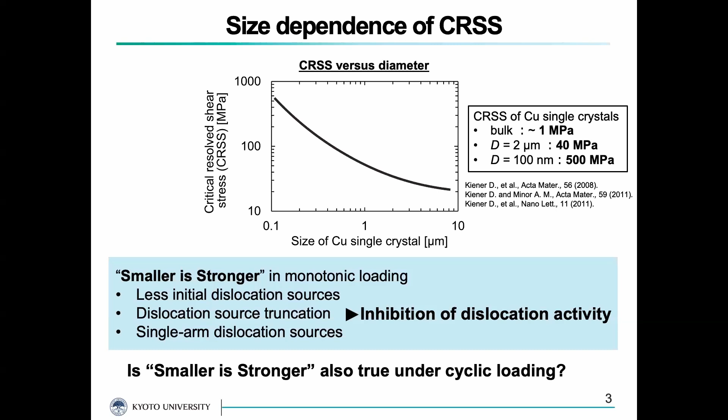We revealed that copper single crystal with a square cross-section of 2 micrometers fatigued at a resolved shear stress amplitude of 10 megapascal, and that was about 1/3 of the fatigue crack initiation limit of the bulk. So smaller is not stronger under cyclic loading. And moreover, micro-sized copper single crystal fatigued at a stress amplitude lower than the CRSS of such size.

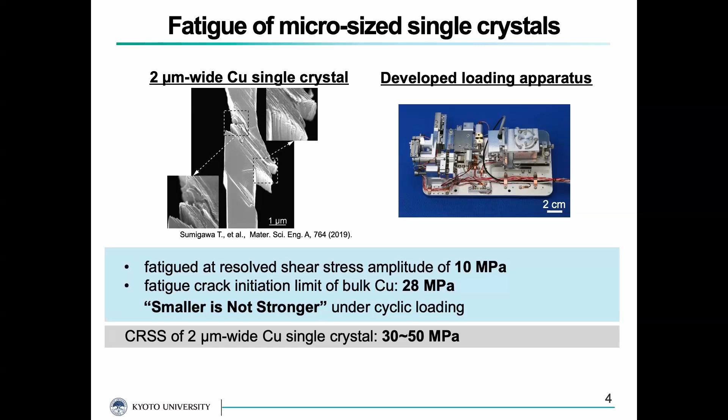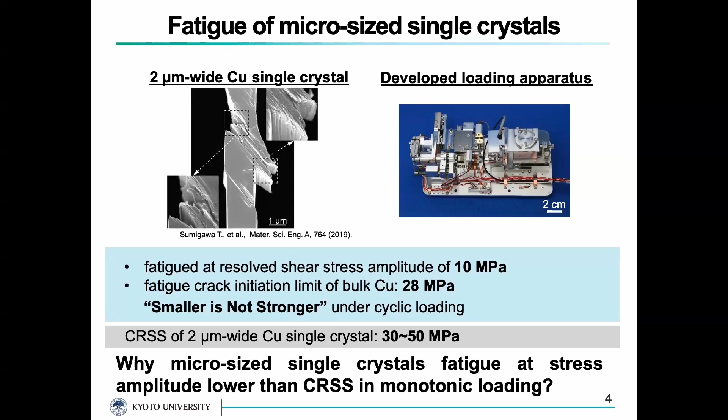Because fatigue in metals appears as a result of accumulation of finite plastic deformation, it is questionable why micro-sized single crystal metals fatigue at a stress amplitude clearly lower than CRSS in monotonic loading. The purpose of this study is to explore the mechanism by which micro-sized single crystal metals fatigue at a stress amplitude lower than the CRSS obtained in monotonic loading tests.

First, we conducted tensile tests and compared the results with previous research to confirm the reliability of our own experimental system, and then conducted cyclic loading tests of different numbers of cycles on multiple specimens and observed dislocation structures using TEM.

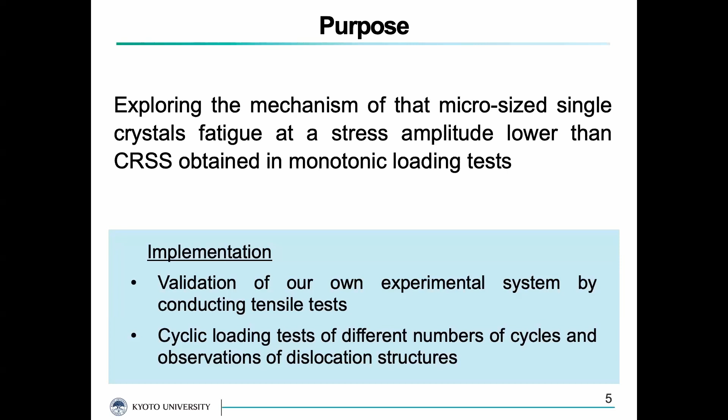We used pure nickel single crystal as the material, and the plate was annealed at 1173 Kelvin for 30 hours. The specimens were fabricated by a focused ion beam (FIB) processing system. The damage layers induced by FIB processing were removed using argon ion milling.

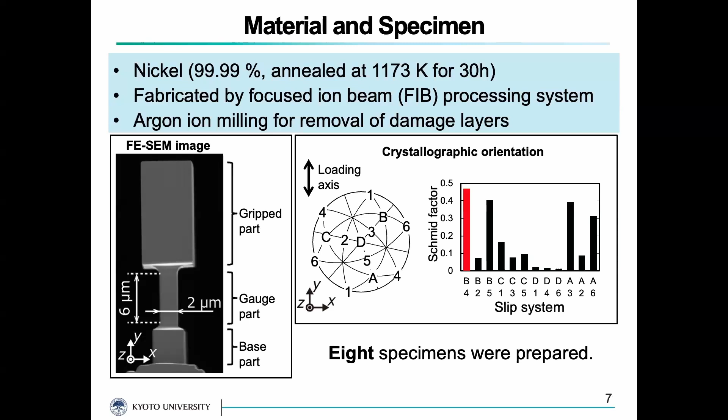The gauge part of the specimen has a square cross-section of 2 micrometers and a height of 6 micrometers. Specimens were fabricated for single slip, with only one slip system to be activated. 8 specimens with the same dimensions and crystallographic orientation were prepared.

The experimental system was composed of our developed loading apparatus, a field emission SEM, and the controller. The developed loading apparatus was composed of a load cell, a piezoelectric actuator, a displacement sensor, a microgripper, and stage. Tension and compression loading was applied to the specimen by gripping the head of the specimen using the microgripper.

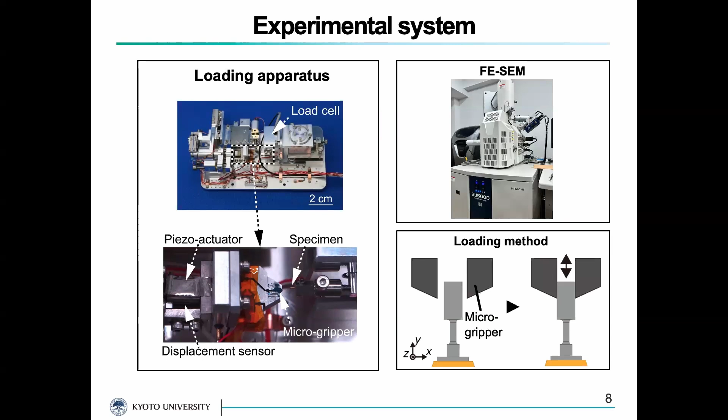To eliminate equipment dependence, we conducted tensile and cyclic loading tests using the same experimental system. First, we conducted 3 tensile tests, and then conducted cyclic loading tests under constant displacement amplitude so that the resolved shear stress amplitude was lower than the CRSS from the tensile test.

5 specimens were subjected to cyclic loading test, but each specimen was subjected to different numbers of cyclic loading. After cyclic loading test, these specimens were thinned, and we observed the dislocation structures using ultra high voltage transmission electron microscope.

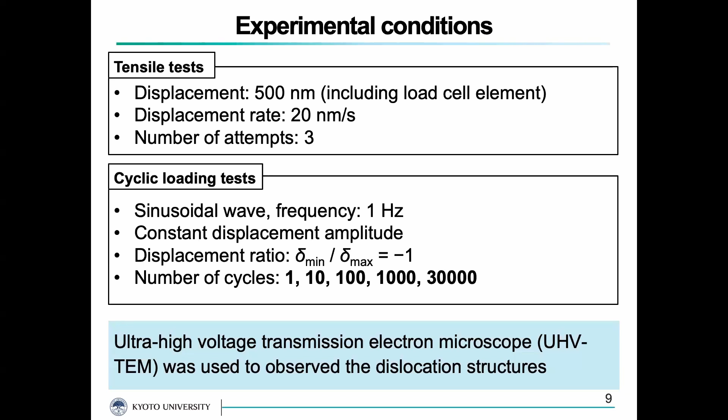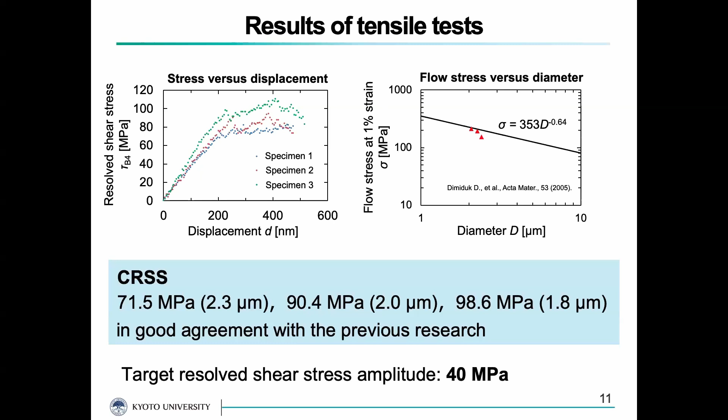And we determined the displacement amplitude in cyclic loading test to satisfy resolved shear stress amplitude of about 40 megapascal. That was about half of CRSS in monotonic loading. And then we conducted 30,000 cycles of cyclic loading test. That was the maximum cyclic number in this study. The resolved shear stress amplitude was about 36 megapascal, clearly lower than CRSS.

However, as we expected, intrusions and extrusions with a depth and height of 300 nanometers were formed. Similar with copper single crystal, micro-sized nickel single crystal also fatigues at stress amplitude lower than CRSS. To reveal the underlying mechanism, we conducted another 4 cyclic loading tests with less cyclic numbers and observed the interior.

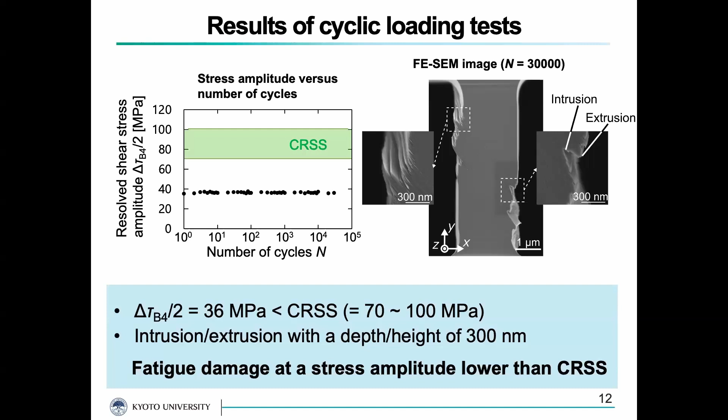After the first cycle, several dislocations were observed in the specimen. However, the dislocation density was not apart from that of annealed metals. But after 10 cycles, the number of dislocations increased in the whole region of the specimen. Some dislocations tangled or intersected each other. After hundreds of cycles, the number of dislocations still increased, and self-organization of dislocation began. Self-organization of dislocation produced this black high dislocation density region in some parts.

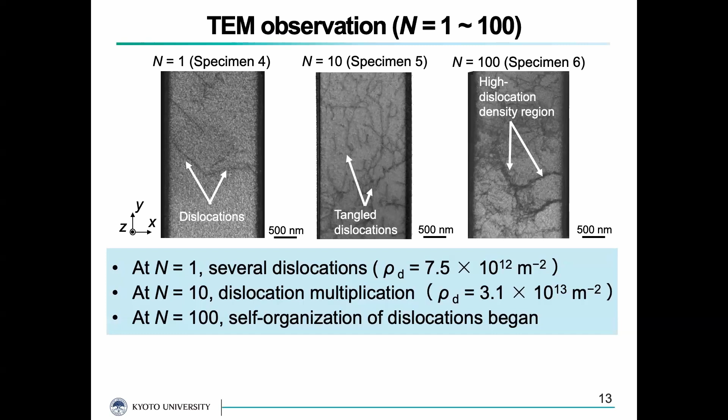Based on this result, dislocations were in motion and multiplied at a stress amplitude lower than CRSS in monotonic loading. Repeats of microscopic movement of dislocation would increase the opportunities for cross slips or dislocation interactions, which are considered to contribute to dislocation multiplication.

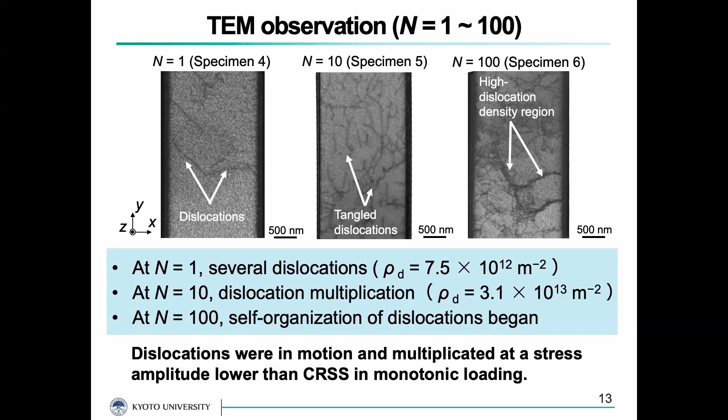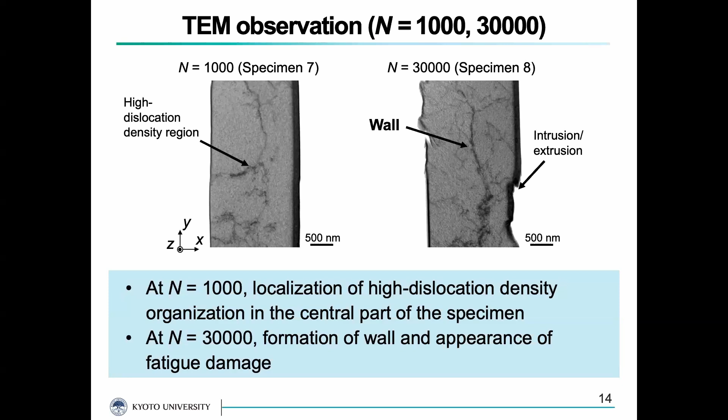At following cycles, the high dislocation density region localized in the central part of the specimen, and finally, a dislocation wall parallel to the longitudinal direction of the specimen was formed in the central part of the specimen. And fatigue damage like intrusion extrusion was formed. The dislocation structure finally formed in micro-sized nickel single crystal was composed of a dislocation wall made of edge dislocations and screw dislocations in the low dislocation density region near the surface. And this structure is similar with ladder-like structure in the bulk.

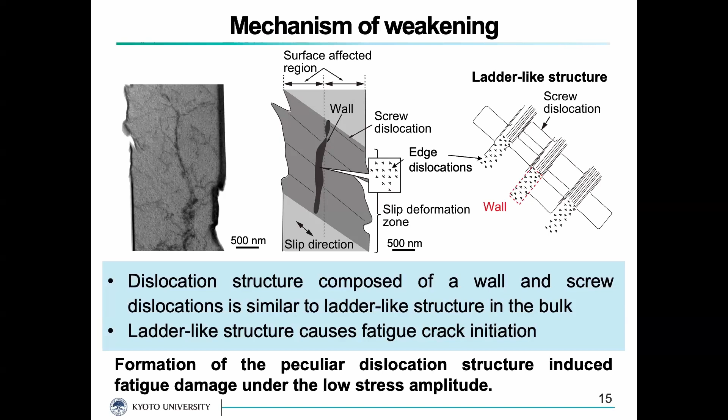Because screw dislocations in low dislocation density region can easily move back and forth and produce larger plastic deformation, the formation of ladder structures causes fatigue crack initiation in the bulk. In micro-sized nickel single crystal, the peculiar dislocation structure similar with ladder-like structures was formed under low stress amplitude due to the influence of the size and surface. And the plastic properties of such peculiar dislocation structure cause the formation of fatigue damage under low stress amplitude.

In this study, to explore the mechanism of why micro-sized single crystals fatigue at the stress amplitude lower than CRSS, we conducted tensile and cyclic loading tests on micro-sized nickel single crystal. The CRSS in tensile test was in the range between 70 to 100 megapascal and in good agreement with the previous research. And in the cyclic loading test, dislocations were in motion and multiplied by cyclic loading, even though the stress amplitude was lower than CRSS. And as the number of cycles increased, peculiar dislocation structures were formed, and it caused appearance of fatigue damage.